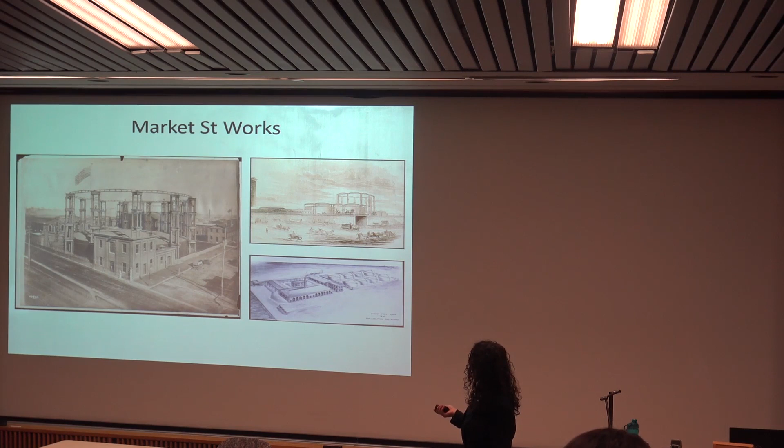This is Market Street Works, from when Philadelphia had a few different companies around the city that then became part of Philadelphia Gas Works. The structure is no longer here, but this was one of the plants at the time. Pretty old picture, right? But that's how some of our business operations happened back in the day.

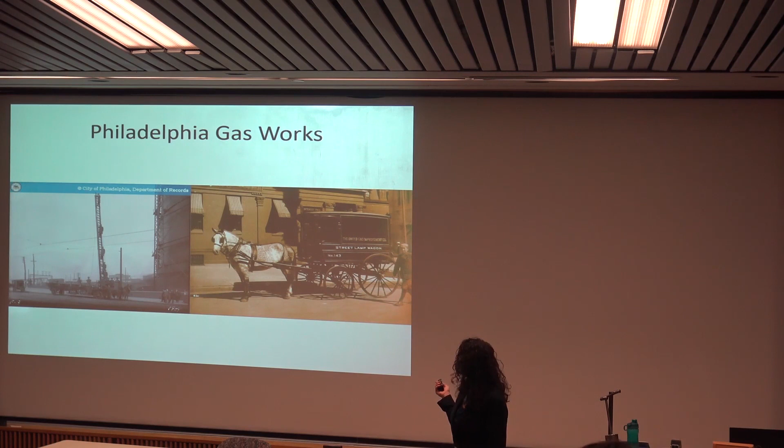Just some basics about the company: we have about 500,000 customers, 3,000 miles of main and 3,000 miles of services underground, and about 134 square miles. In comparison, Ithaca is about 6 square miles.

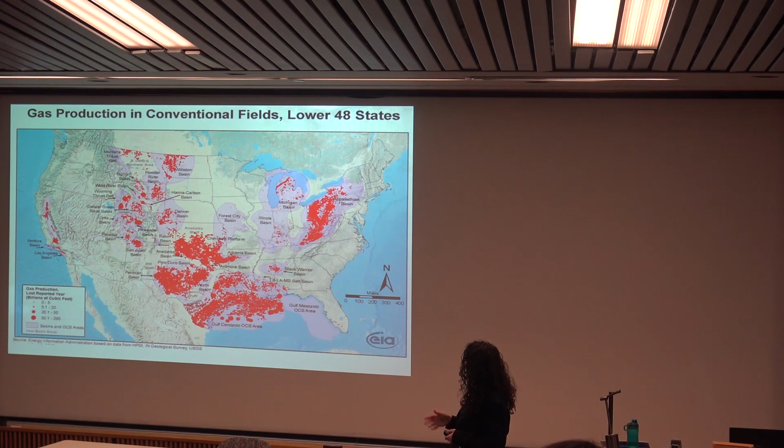You've probably seen these types of charts before, hopefully in your other energy classes. I put this up to give a broader perspective—where is gas production happening? This is from the Energy Information Administration, and I'm going to contrast that with the next one for shale gas.

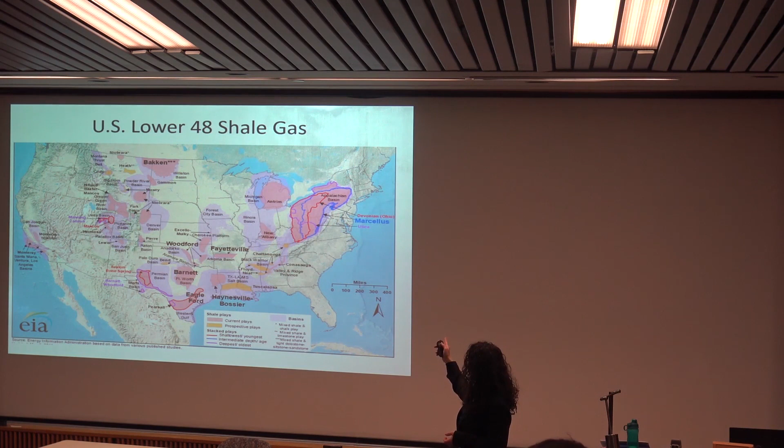As you can see, a lot of the shale gas is in the area where we are. This is, again, a broad perspective of how many trillion cubic feet of natural gas resources we have at this time.

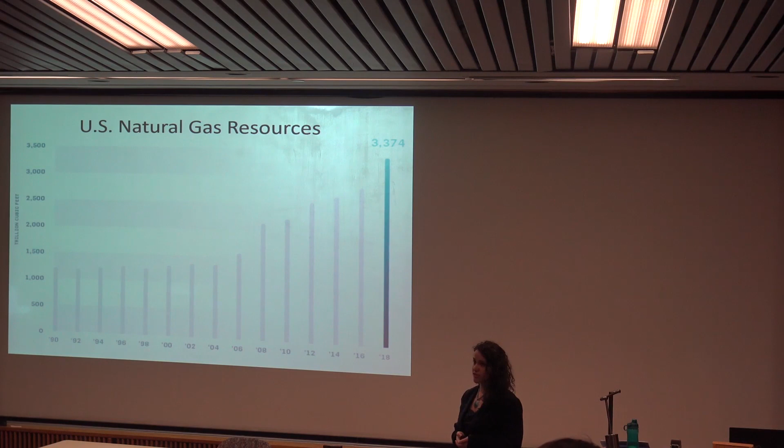I wanted to start this presentation with the bigger picture, in terms of, on the left, you can see the percentage of natural gas that's our primary energy consumption. This is 2018, and that number used to be much smaller. As we think about what fossil fuels we want to be displacing, we think about coal, we think about oil—what is the cleanest burning, and what does the future look like? How can we get there?

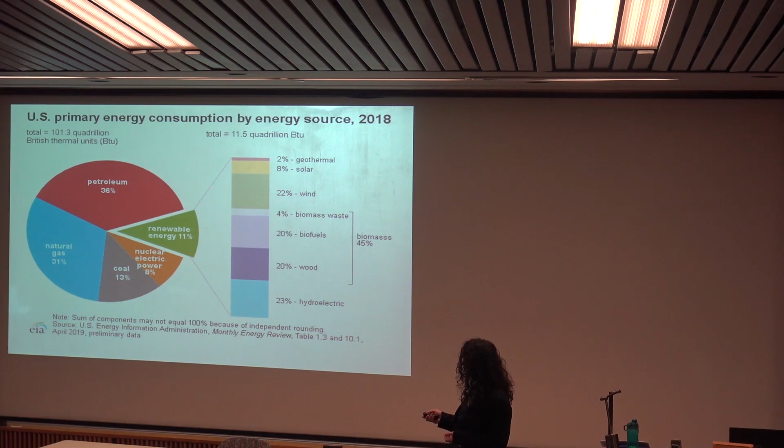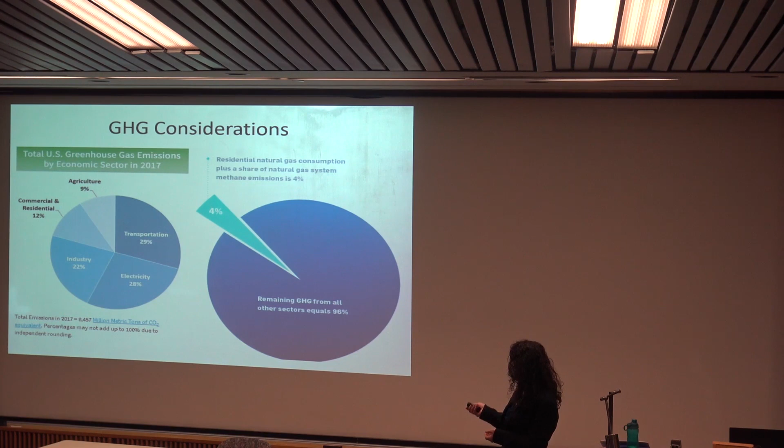This gives you some perspective that only 4% of residential natural gas consumption is the entire pie of greenhouse gases from all other sectors. That's only residential, but it's still important when you want to think about your footprint and how it relates. When we look at the entire sector, we can see where we can make the biggest changes for that long term. I'll come back to that one later.

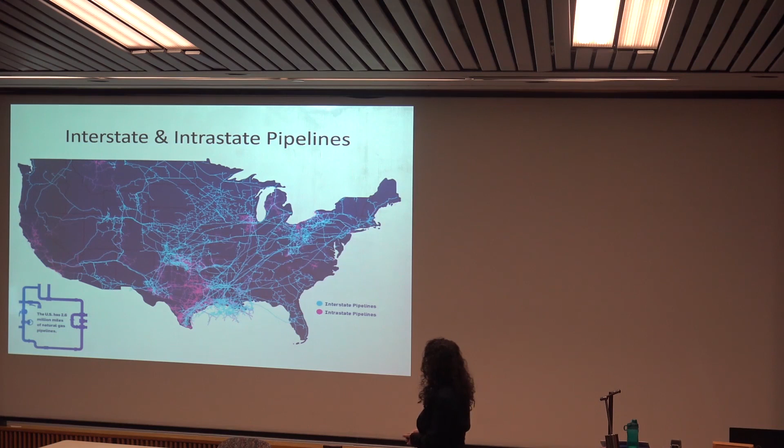Interstate and intrastate pipelines—this is what it looks like underneath our ground. It's pretty busy down there: 2.6 million miles of natural gas pipelines. I'm not going to focus on this side of it, but this is where it's all coming from, and hopefully you're learning about some of those things. Philadelphia Gas Works is this side of it—we're the distribution company.

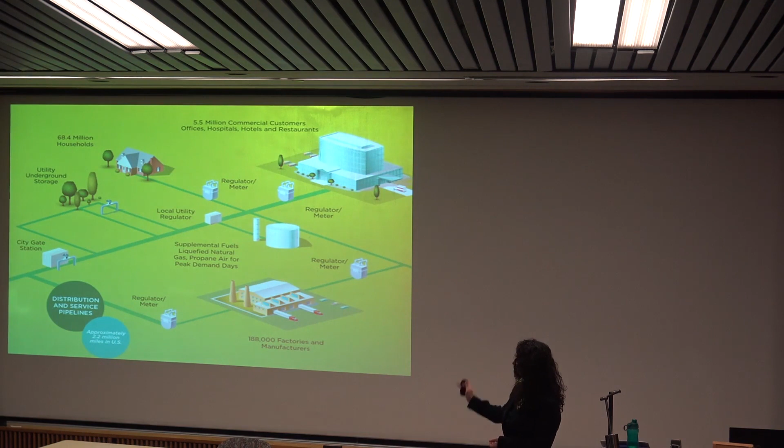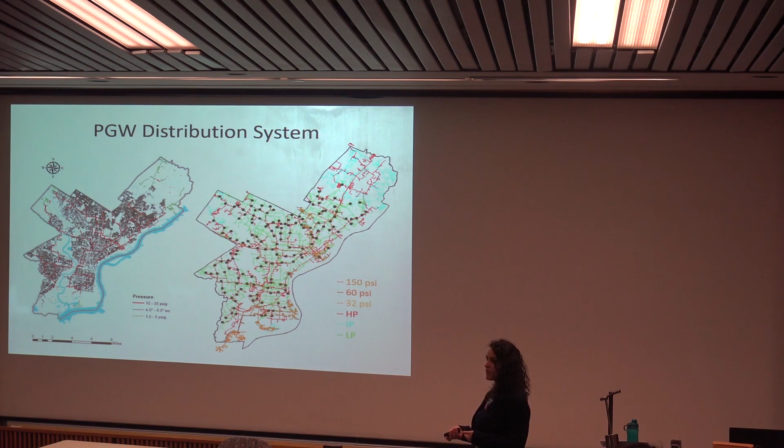So what does our distribution system look like? On the left-hand side, you can see a nice chart. All of the black that you see is cast iron. We have different pressures across the city, and as you can imagine, it's a balance—we have to make sure we're able to provide the right amount of pressure to every customer. Your appliances are rated for a certain number of inches water column, or high pressure. We have an entire department making sure we're providing safe pressure in our system.

Here are some of the materials underneath the ground. I mentioned one of them—anybody have any other ideas of some of the pipe materials? PVC, so plastic, steel, cast iron, and ductile iron. That's what's currently underground.

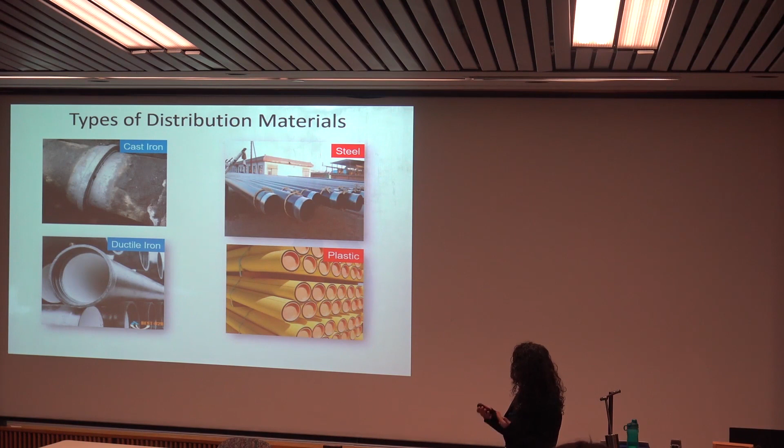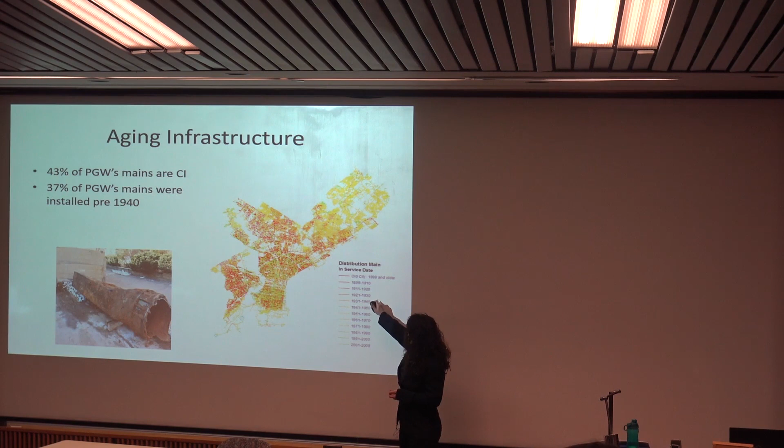As I mentioned, aging infrastructure—43% of our mains are cast iron. I'm going to get into our main replacement program and how that ties in. Because we're such an old system, we've been around for 180 years. Over here, all of the yellow is between the 40s and 50s. The green is what's new, which you can barely see. But all of the red—we have some pipes over 100 years old underground.

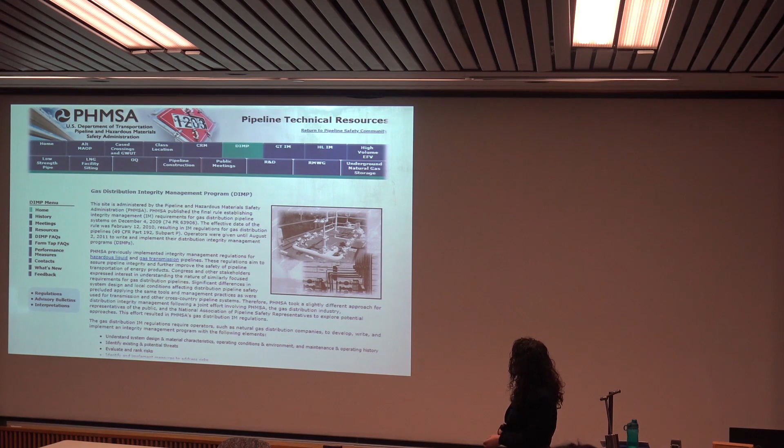PHMSA, the Pipeline and Hazardous Materials Safety Administration, mandates through the Department of Transportation that we have a distribution integrity management program. That's knowing what your system is, identifying what the threats are, and then evaluating and ranking the risks. This informs part of our process in terms of how we go about creating projects around the city.

I work in planning—in that department, we have everyone working on the plans of the street. I know some of you have to take an AutoCAD or CAD class; sometimes we're looking at our maps of the streets, what's underground, what's in the system. So DIMP, as I mentioned, leads to a long-term infrastructure improvement program and our main replacement. We also have accelerated actions and a survey program that I'll talk about. This is important because every year we have a baseline goal of how much main we have to be replacing.

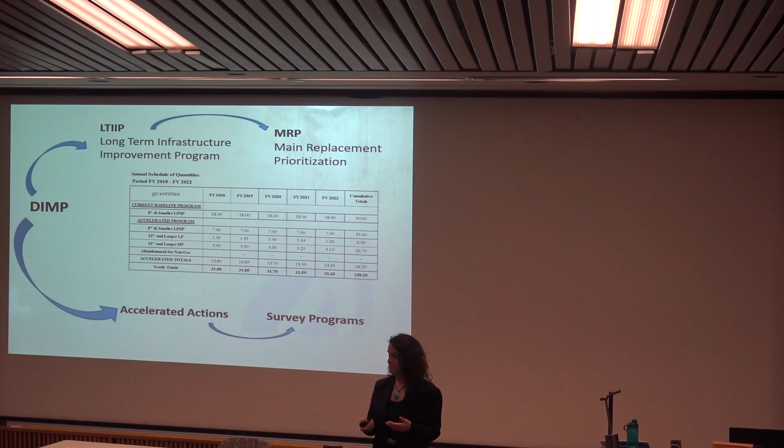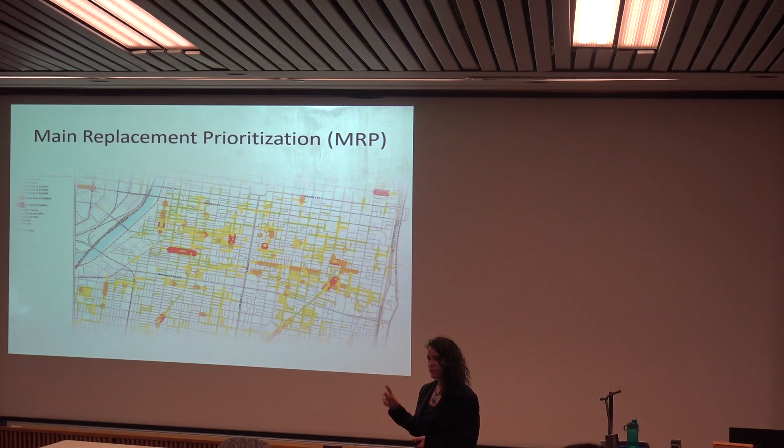And that leads us to our main replacement prioritization. In this chart, what you could see is that the red is what the programming shows. We have people that work in GIS, people that are working to geocode where the prior leaks happened in the city, so we can prioritize and make sure that's the first place we're going to be replacing the infrastructure.

So the process is geocoding where the leaks are, running risk analysis on them, and then putting together different scenarios. We're living in a congested city, so we also have the water department to deal with, the streets department, PECO our electric, Verizon, and other institutions and companies in the city that have different projects going on. So how do we work with them to make sure everything is happening as efficiently as possible for our public?

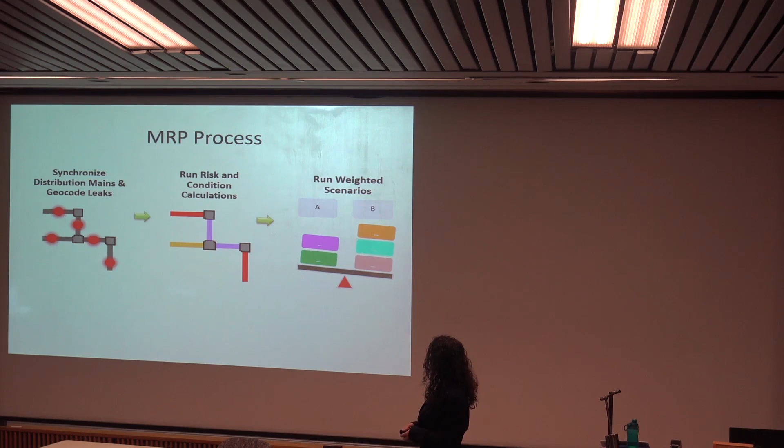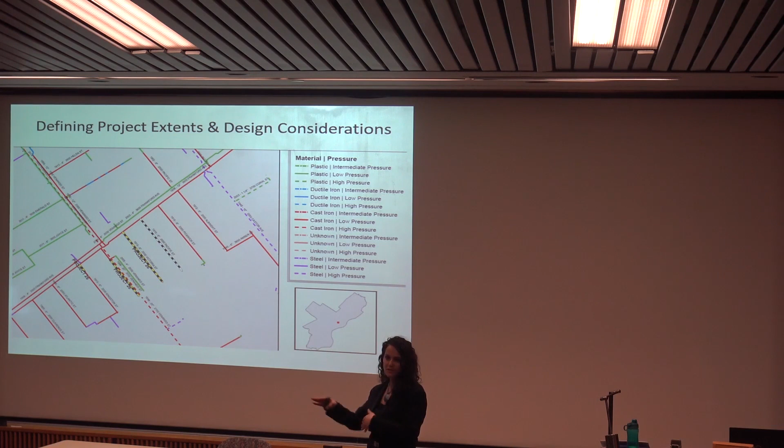A couple of years ago, the Pope came to Philadelphia. We have other big considerations to make sure there's not work happening when there's other things happening in the city that we have to be aware of.

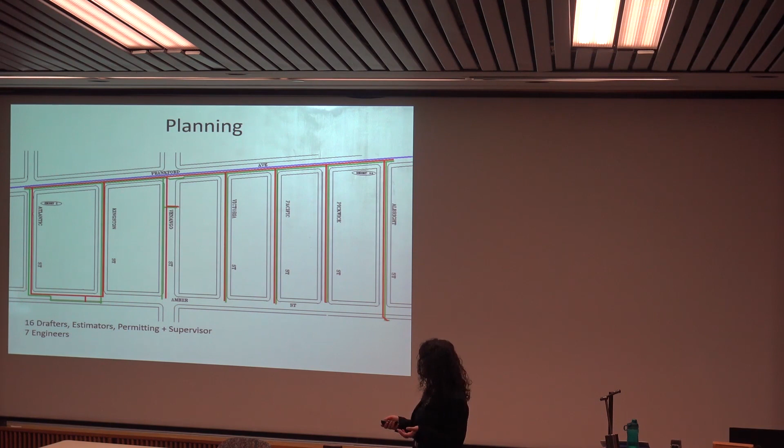So I wanted to show you, when we install a new main, what does that look like actually for our customers? Because if you're in the middle of winter, or if you're just coming home from dinner or from work one day, you don't want to have interruption of your service. You want to make sure your boiler has the necessary energy and you can cook.

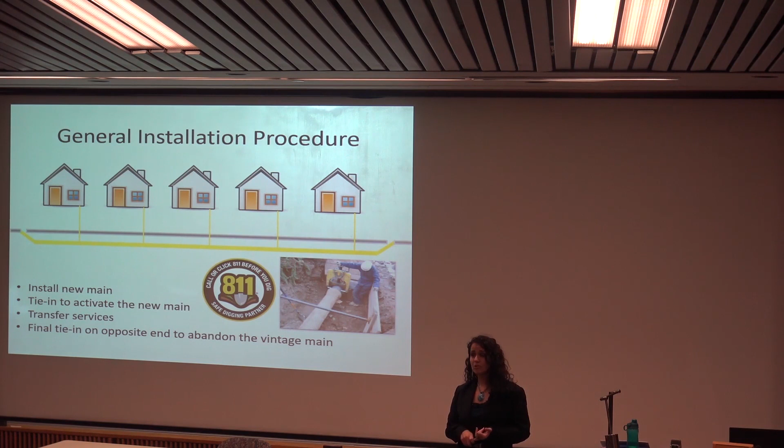So for most of our grid, there's rules as far as what the pipes look like when we go underneath the ground. We have to make sure that our services are perpendicular. Sometimes there's exceptions - we also have a steam loop in Philadelphia that we have to be aware of, and trolley tracks that we have to work around. So underneath the ground is pretty busy.

We do our best to let our customers know that we're going to be working in their area. What that looks like is on our website, some maps letting them know where we're doing work at the right time.

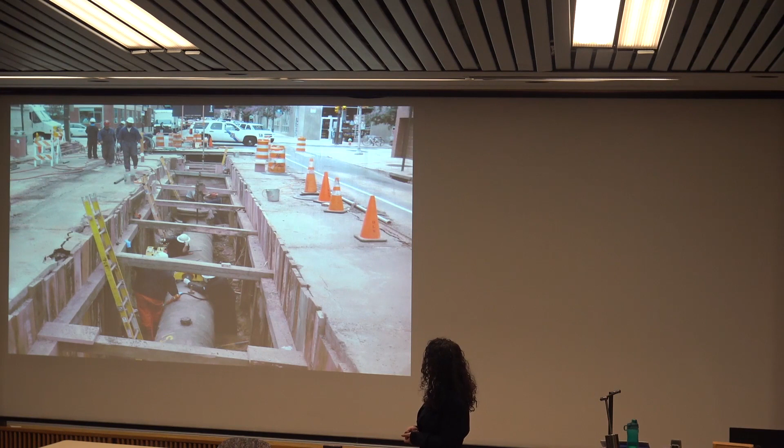This is a pretty busy part of the city - right downtown, and as you can see, we have a lot of people on site. Sometimes we need to use police to make sure the street is blocked off the right way. Sometimes we work with contractors as well. I mentioned we're a 1,600 employee company - of that number, we have a union that is doing the work on the street. Those are the people going into your homes, literally digging up the street.

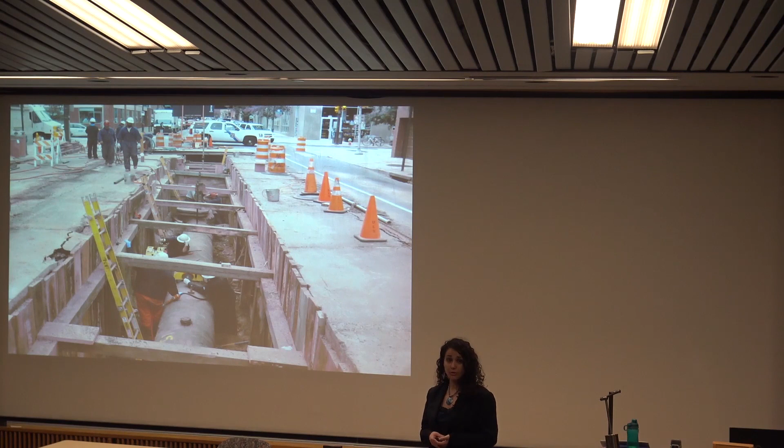So, distribution work. I wanted to show this because 180 years, things have changed a lot. Yes, we still need to be digging by hand, but sometimes we also have available to us a vac truck. So there's just some numbers, and they're rough numbers.

That's 2.5 to 13 cubic yards an hour productivity, as compared to less than a cubic yard per hour for hand digging, right? So all of these things are important because as engineers, we're also approving estimates of how much things cost, right? So I need to know for this concrete in this area or another area, how much time is that going to take? How much of the ground do I have to open up? Those are all part of it.

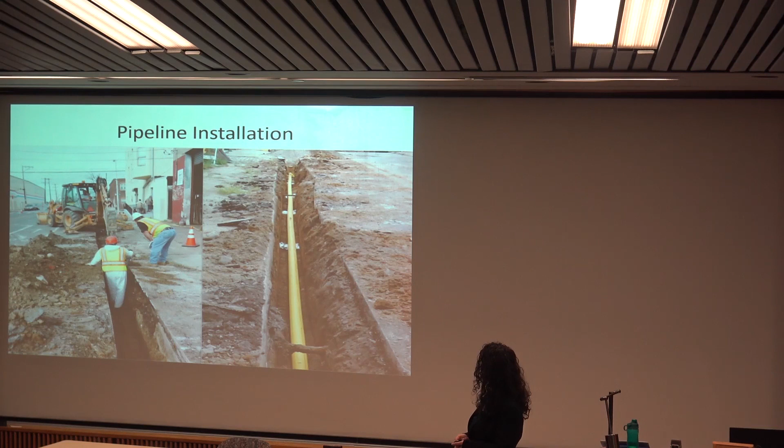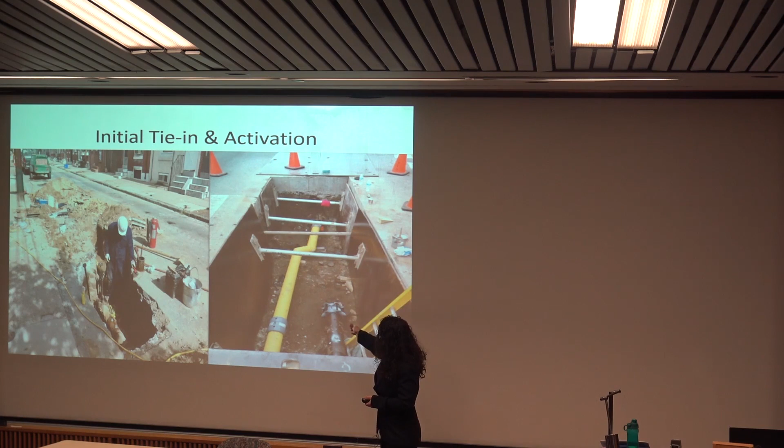And here's another photo on the left. We have contractors working with us. On the right would be a typical, I think 3 or 4 inch plastic main replacement. In this photo as well, you can see the new main, you can see the old main, and we have to cap and put that out of service, right?

So we also have accelerated progress. If in one year we're mandated or we're putting a goal of replacing 18 miles of main, we're always trying to beat our goal. And how can we be more efficient?

Cast iron can leak, so can plastic, right? But we want to make sure that the materials we're using are the best available, that we're able to reduce any potential for leak, right?

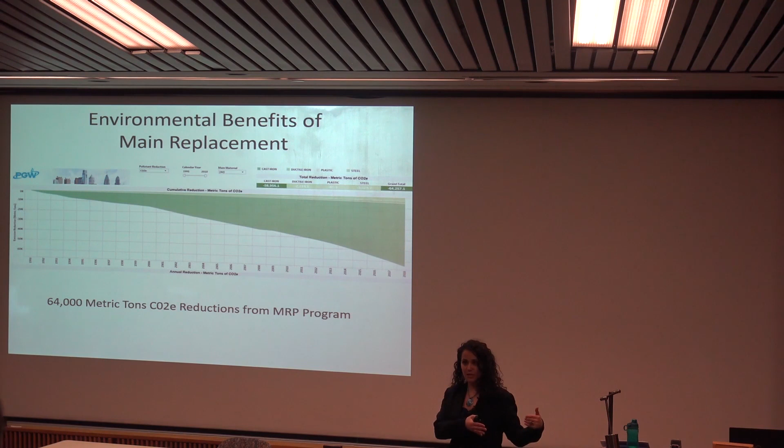Now with the climate getting really cold and then really warm on a day-to-day basis, those shifts have serious implications for our pipes, right? We're not used to the climate that used to be and what might be approaching, right? So we have to be considerate of that.

And then I mentioned surveying. This is actually coming from state laws as well, federal laws, excuse me, to make sure that we're always surveying our system to look for potential leaks.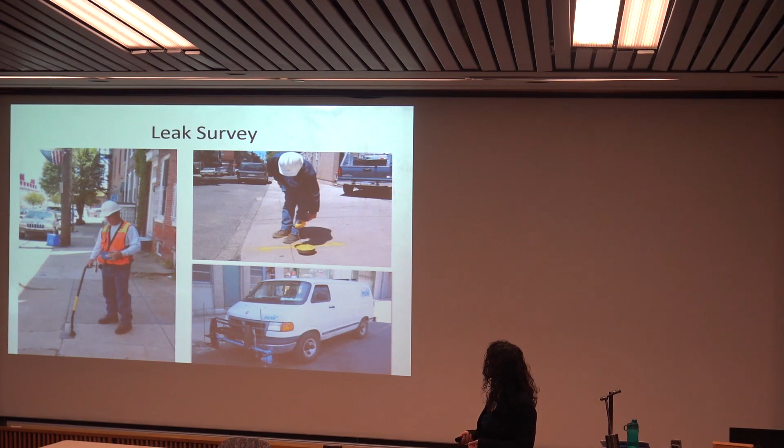I'm in management, so what that means is that I need to make sure that we have the right amount of people in the right part doing the right jobs, right? Sometimes that changes throughout the year, right?

And odor complaints, right? It could be from an appliance leaking, it could be from a street leak, foreign odors, because sometimes there might be industry in your neighborhood or area and people think, okay, let's just call the gas company because it might be them. And sometimes it doesn't have anything to do with our infrastructure, but we have to respond to it. We work very closely with the fire department to make sure that we respond appropriately.

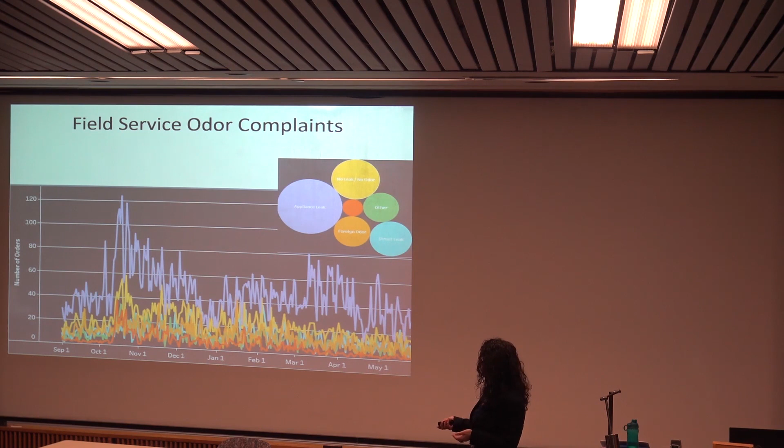And these are other areas of the company, making sure on time. So network analysis—you can imagine as we get more customers, or if customers go offline, we have to make sure that we have the proper pressure in different parts of the city.

We have pressure recording equipment all around the city, making sure that things are the right pressure. Those are just photos of some regulators, as I mentioned. The majority of our system is low pressure, but we also have some high pressure main, and we have to make sure that's regulated to the right pressure.

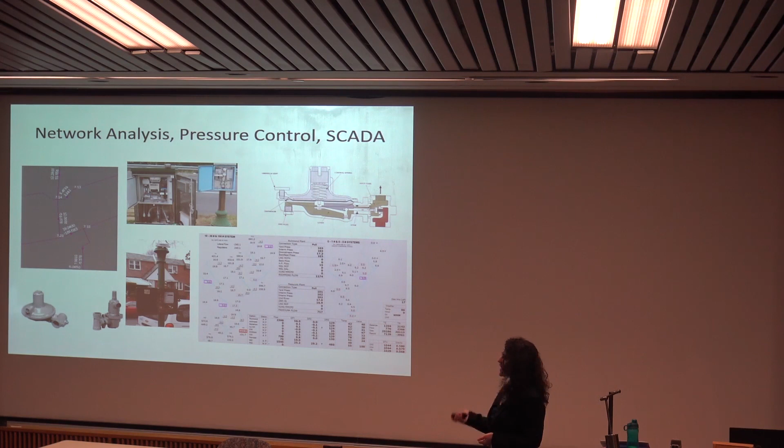And SCADA, that's supervisory control and data acquisition, right? It's constantly making sure that we're at the right place.

When I first started at PGW, I actually worked in the meter shop, so I got some hands-on experience with our meters and our equipment that's in the field.

Meters are important to gas companies because they're registering how much gas you're using, and how much gas you use is how much you're going to get billed, so they're very important pieces of the equation. Anyone know any of the names of the kinds of gas meters up here?

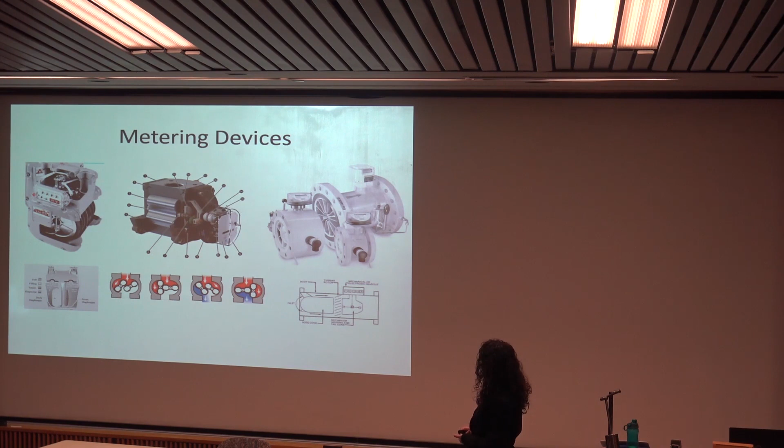So all the way on the left is a diaphragm meter, in the middle is a rotary meter, and on the right is a turbine meter. There's different uses. You might be most familiar with the one on the left because that's the most common used in residential. Rotary would be for more consumption, more volume, different pressures as well. I remember I took a class here where we built an air motor, and it looked very similar to a rotary gas meter.

So the future, right now, how do we get the data from the meters of how much gas you're using? In the past, you had an entire crew of people that would go into people's homes and actually read your gas meter. Does anyone remember that? There's still places where that's done, and that makes sense.

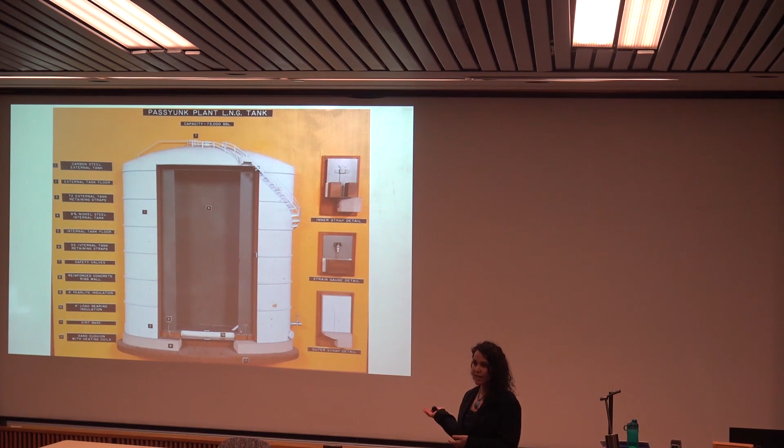I have here a schematic of our gas plant at Passyunk. I wanted to show that our company is not just field operations, although that's where I work, but we have gas supply, gas control, and our plants as well. So this is a schematic of the Passyunk plant, and then we also have 2 LNG plants, LNG tanks, at Richmond.

There's an entire environmental services, chemical services part of our company. I mentioned earlier the EPA. The EPA has only been around since around the 70s, so our gas company has been around a lot longer than that. Now that the EPA is around, we have to make sure that we're doing all of our operations per regulation.

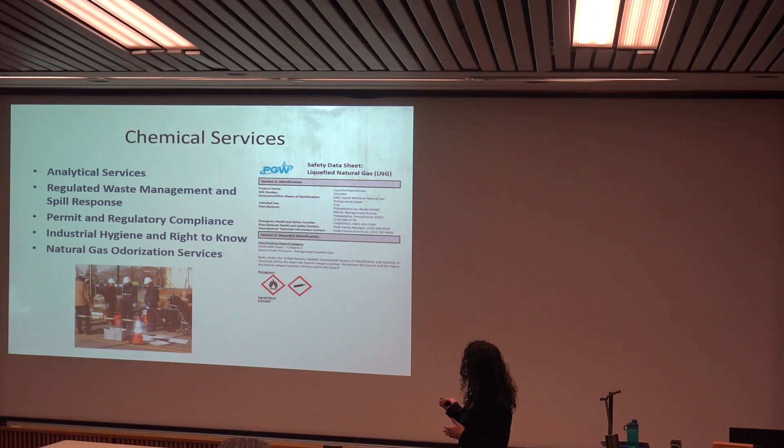We have a fleet of CNG vehicles. Only a small portion of our fleet is CNG, but we have our trucks that you saw earlier as well - all of the operations to respond to leaks, all of the construction crews have trucks. This is another area we're using so that we can promote the use of natural gas as an alternative fuel.

Micro CHP - Cornell has CHP, right? Is everyone familiar with what that stands for? Yes. So you know that when you make your own electric locally, that's much more efficient. Since you want the energy for your own use, what would be the reason that you would want to do it? It's efficiencies, right? The electric grid - we can have another conversation, I'm sure you've had seminars about that as well, about how much you're losing just in the electric grid distribution.

I mentioned about the main replacement and how that is supporting reducing our emissions just in terms of our main replacement, but we're doing our part not just in that area. There's always savings that we can do and efficiencies as a company in many other areas as well. So I wanted to let you know we're also working on that.

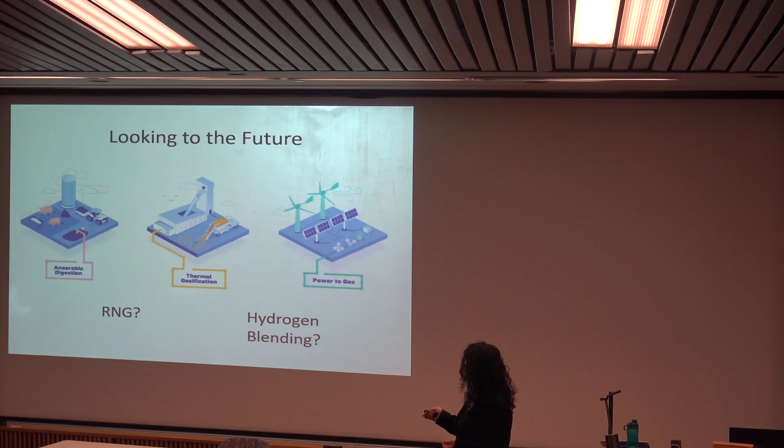We're always recruiting smart and bright engineers. I hope you can keep a really broad perspective of what our energy landscape looks like in the country. It's very exciting to be on the cutting edge of what the next fuel cell might look like, or what our alternative vehicles might look like, and the field is very vast.

I never imagined that I would be working at a natural gas utility. I'm very proud of it. I think as a municipal utility, we have to be responsible not just to our shareholders - we don't have shareholders, actually PGW is a nonprofit. It's more difficult to think about that in terms of the scale, maybe what you're more familiar with, smaller nonprofits. But any of the money that is recuperated from charging customers for their energy use on a monthly basis gets back into the system to make sure we're keeping the system safe and moving forward.

So now I hope we can go into a discussion. I'm sure there are some questions. I'd love to hear them. I hope I can answer them.

I do want to say I'm very honored that an old professor of mine is in the room as well, other than Professor Hammer. So it's very exciting to be back here. And as a student, sometimes we're inspired because of different reasons, and there are so many ways that your education here at Cornell could take you.